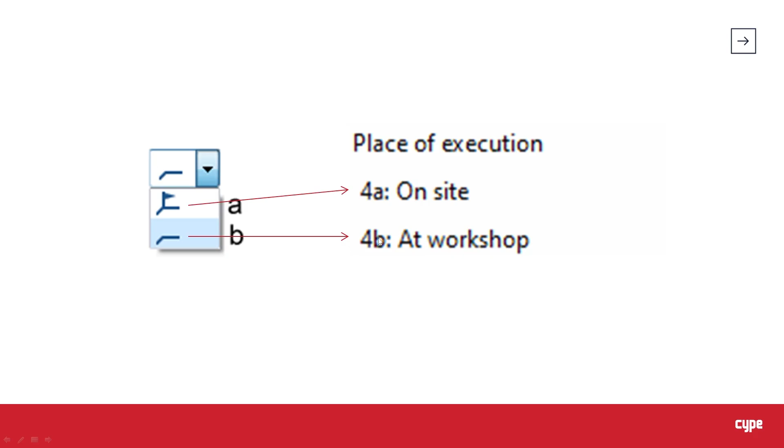And if we say that they are welded or bolted at workshop without the flag, that will mean that those parts that are welded or bolted at workshop should be detailed together, forming an assembly. For better understanding of this concept, we can take a look at the first connection that we described here in our model. Because even though this connection is very simple, it contains both examples.

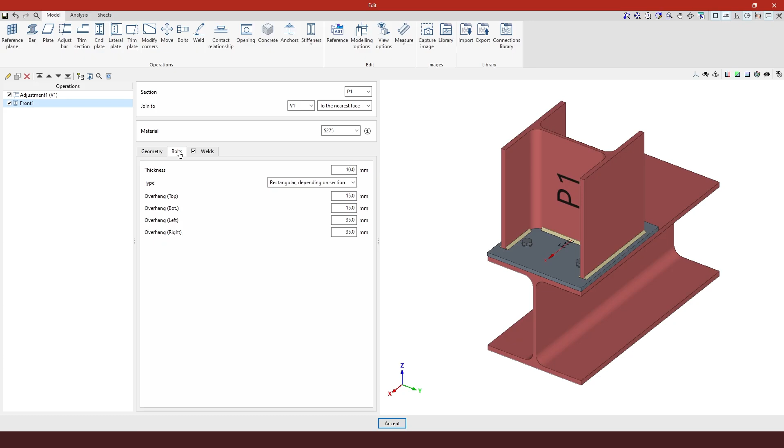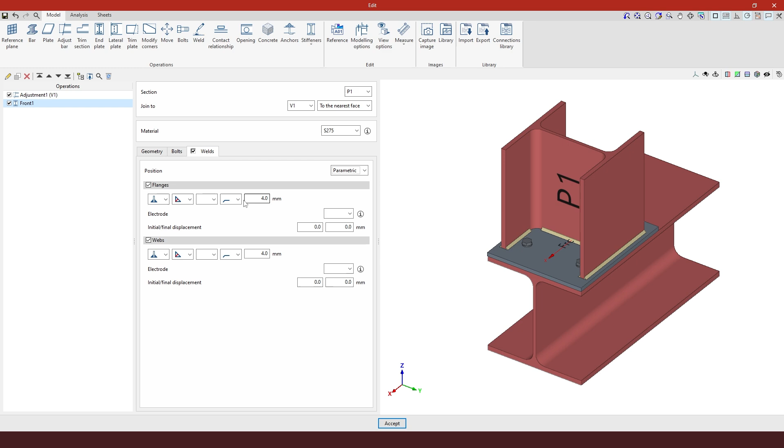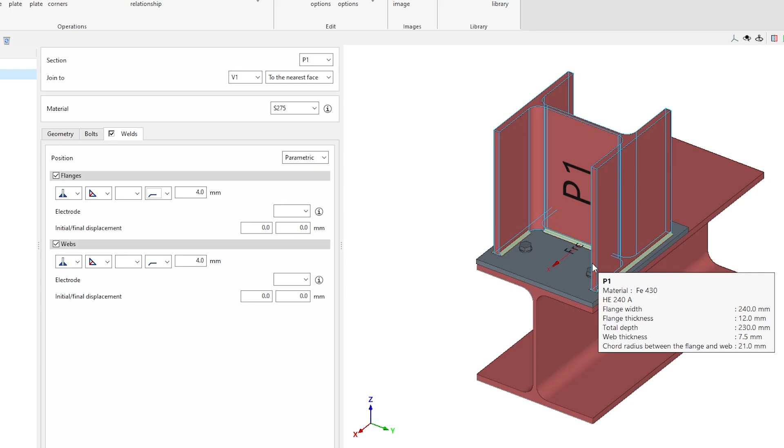So in this connection, we said that the bolts were going to be executed on site, as bolts usually are. So this plate is not going to come already bolted to V1 when they come to the site. On the other hand, the weld we set to be executed at workshop. So the flag means it's executed on site, and no flag means the weld is executed at workshop. So for the detailing, this is very important because P1 and the plate, since they're welded at workshop, are going to come together forming an assembly.

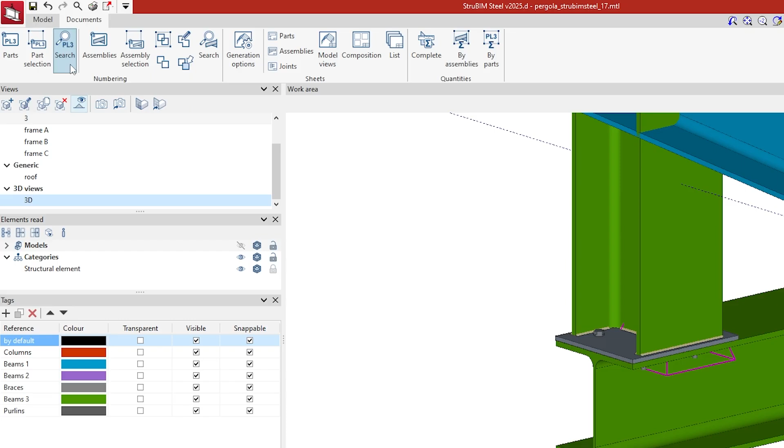Let's move to the Documents tab, and we find the numbering menu bar in which we can differentiate right away between parts and assemblies. So we can use this option, parts, to number every part of the model, or we can select some bars and only number those of the selection, and we can use the search option. Once they're given a reference, we can search each part by reference. So in this case, I'm going to number each part. I'm going to select to number all the elements in our model as of the initial number.

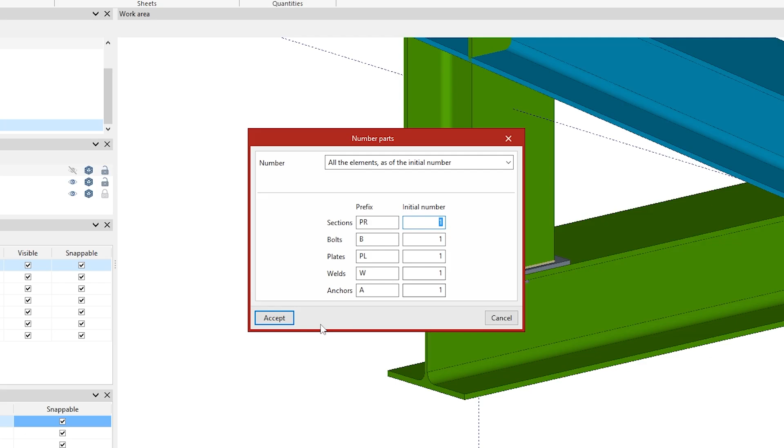There are also other numbering options, because if we number the model before we finish it, it's most likely that we're going to have some differences in the model, and some parts that we add later on might not be numbered. So we have different options to number once and for all the elements in our model. We can number only the elements that are not yet numbered as of the initial number, or continuing with the numbering. In this case, we haven't numbered anything, so we select the prefixes and the initial number for each type of part, and we accept.

And as for what the software has done, please notice here in the top right corner of the work area, the information of the different parts I place the mouse over will appear. So this P1 bar has been numbered as part number 8. This other has been numbered as part number 9. And we can also see that the plate has a different prefix, so it's PL1, plate number 1, but they're of course individual parts.

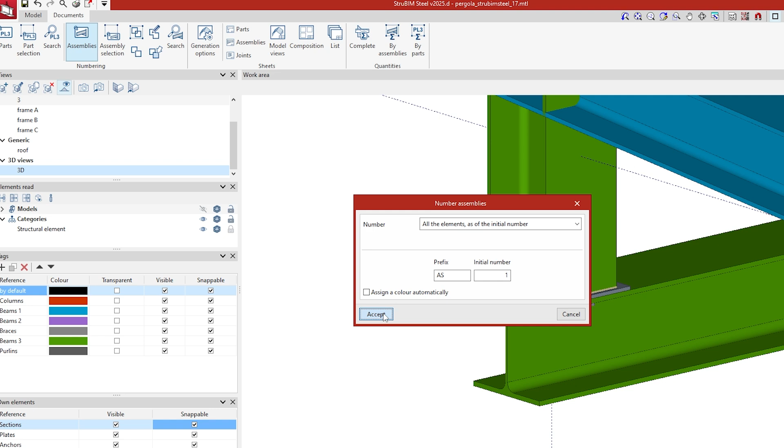And now if we number the assemblies, the software is going to search the model, and if there are any parts that are welded or bolted at workshop, they will form an assembly. So we again have the option to only number a selection of elements. We have one crucial aspect: assigning the main part, because usually when a few parts come together, for the drawings, it is going to be important to determine which is the main part that determines the global axis for that model. So don't worry about it yet. We will see it later on.

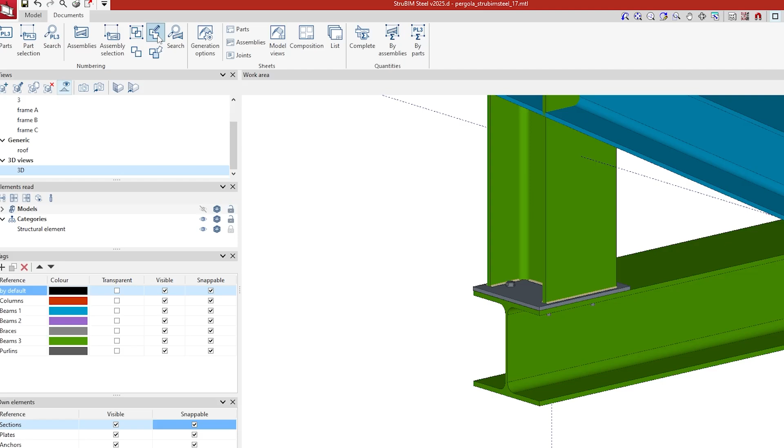And if I try to edit this vertical bar, I can see that it forms an assembly with the plate. The plate also gets highlighted when I place the mouse over the bar, because they form an assembly, in this case assembly number 12.